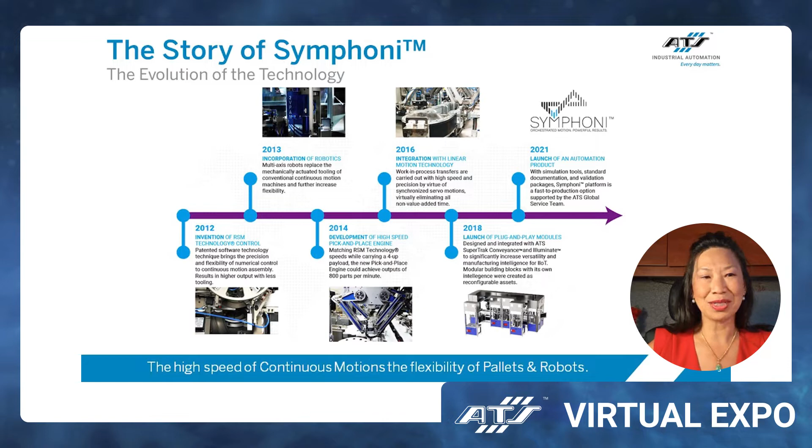It didn't take long for us to realize the huge opportunity. What product or process can have more variation than Mother Nature? The answer is nothing. Since we were able to conquer what Mother Nature threw at us, why not apply the principle of speed matching and synchronous motion to the assembly of lipstick, nail polish, toothbrush heads, inhalers, electro connectors, razors? You get the idea. It's pretty much products that have small discrete components that fit in your palm that need to be assembled. Each generation of Symphoni has addressed the limitations with conventional assembly technologies, from continuous motion, indexing motion, to pallets and robots. Today, after 5 generations, multiple patents, and machines sold across 4 continents, Symphoni gives you the benefit of all conventional assembly technologies without their limitations.

On the supply side, if one factory or one region is disrupted, you need flexible equipment in other places to pick up the slack. On the demand side, if consumer behavior changes rapidly, which it does all the time and at an increasing rate, then you need flexible equipment which can take on new processes and new products with minimal adjustment and time expended. This is what Symphoni is all about. You don't have to give up speed for flexibility, nor should you give up flexibility for speed. Customers want their product when they want it. They want it unique to them, and they want it fast. And so should you if you want to win. Symphoni combines the flexibility of pallets and robots with the high speed only realized previously with custom continuous motion machines. With Symphoni, you don't have to choose. You can have both.

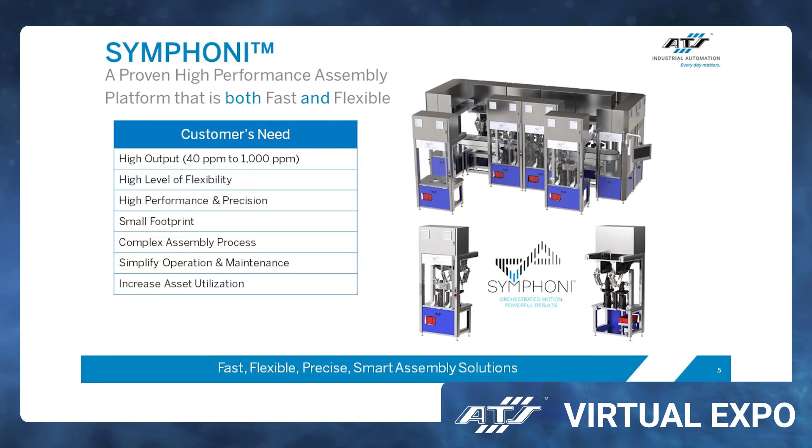Symphoni is a digital technology. The process in a Symphoni machine is the same as your current trusted process, except that the mechanical cam is replaced by electronic cam. In short, you can skip many of the obstacles that plague custom automation. Too often, these kinds of obstacles cause the introduction of a new product to fail.

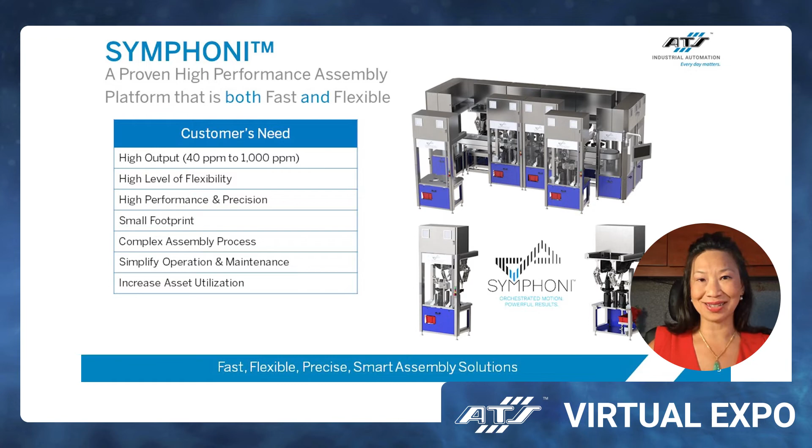Instead, Symphoni is versatile but uncompromisingly fast. It is elegant in its simplicity, but allows for a complex assembly process. It is high performance with small footprints. It speeds up time to market while reducing operating expenses and capital costs.

Imagine a custom automation solution for the assembly of soap dispensers. You go through all the hoops of many months to custom design and build a perfect machine. Your sales team gives you an annual sales projection for the next few years. From your experience, you know you have to buy a machine with a capacity that can meet the highest projected volume. However, during prototype phase, you send the assembly process to a cheap labor country to be hand assembled.

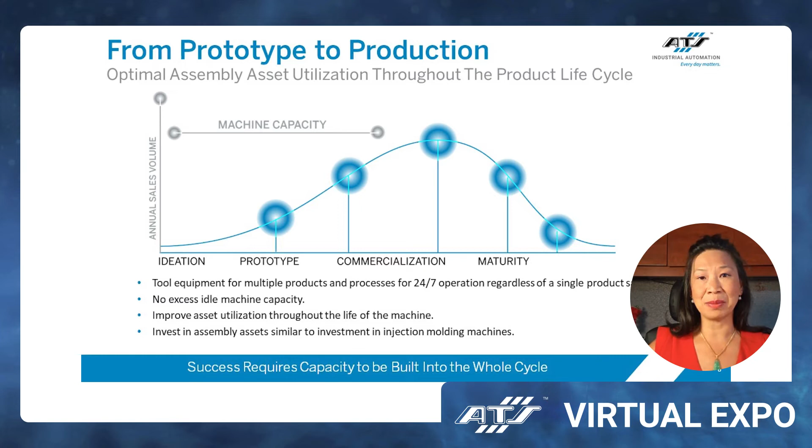In a best case scenario, as your production is ramping up, your machine builder delivers your custom assembly machine on time and you're able to meet your product launch date and meet the sales volume your sales team predicted. But what happened to that machine as the product matures and sales start to decline? You have an expensive asset that's underutilized and taking up expensive factory space.

With Symphoni, you can start with one module, which we call Sonata, to prove out your production process during your prototype phase. You can continue to use Sonata Cell for market testing. As your product proves successful, you add additional modules to configure a full Symphoni machine. As the product matures, you add new toolings for additional products. Thus, Symphoni is like your injection molding equipment, which depreciates over the life of the machine and is not written off over the life of your product.

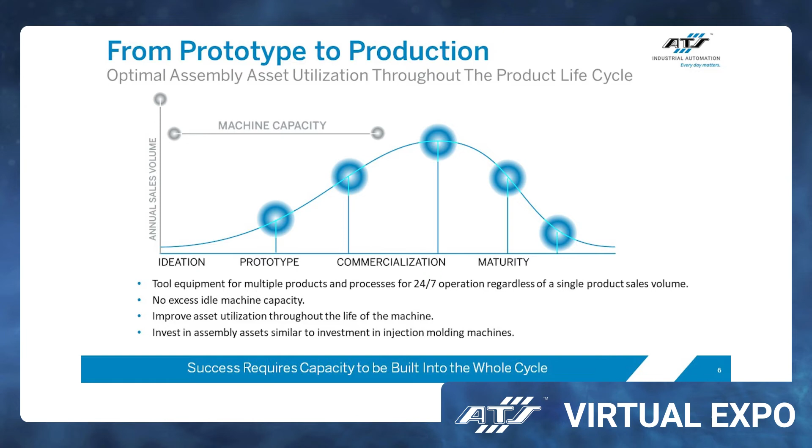It is a flexible, depreciable asset that never sits idle. It can run 24/7 by running multiple products or processes. It will never gather dust in a corner because you can change the tooling or reconfigure the module as your business changes. So let's recap.

Symphoni offers three main benefits: assuring your product development process, including manufacturing, validation, and approval, thus improving time to market. It lowers your capital costs by leveraging your investment from product development to production, eliminating duplication while maximizing your asset utilization. And it reduces the price per part through lowering your labor and operating expenses. Those are the top line tangible benefits.

But Symphoni offers your business one other thing in the face of a rapidly changing world. You can call it resilience or flexibility, or from my speech about global trends, agility. But for the sake of this presentation, the word we want is opportunity. Chris, over to you.

In this use case, a contract manufacturer needed to reshore their production of soap dispenser assemblies. The traditional solution for this type of assembly is continuous motion equipment. However, given the nature of contract manufacturing and the customer's production ramp, the utilization of a continuous motion machine would be extraordinarily low. The use of Symphoni would permit the contract manufacturer to fill the excess capacity of the equipment, which is inevitable during the initial product ramp, with a supplemental product, thereby increasing their profitability.

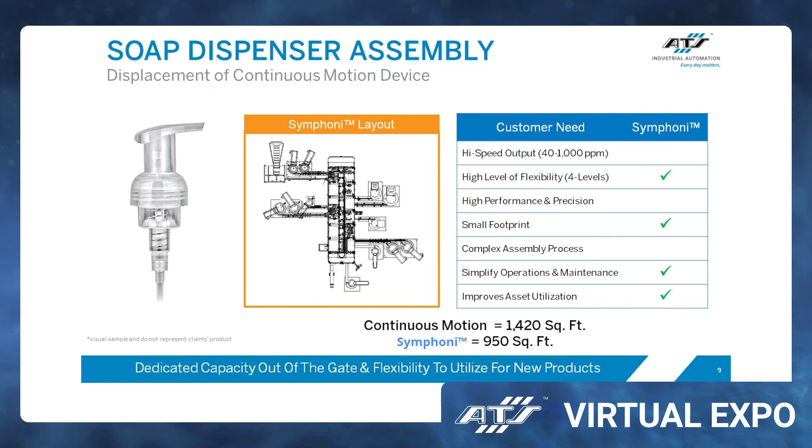This production layering is enabled by lower tooling costs of Symphoni, the flexibility of the servo-controlled assembly systems, and the user-level programmability of the system. Symphoni inherently has lower tooling costs than continuous motion systems. For example, a typical assembly station on a continuous motion machine may have a dozen or more of the same tool for the same operation. Symphoni in this case has only two.

Therefore, to make the system capable of two products, the continuous motion system would require 12-plus tools to be changed or replace the entire module. Symphoni can be changed over with simple replacement of two pick heads, the RSM disk, and a selection on the HMI. Symphoni accomplishes all of this with a much smaller footprint. In this use case, ATS considered a traditional cam-driven solution versus the Symphoni platform.

The contract manufacturer recognized the ability to take on new projects using the additional capacity of the Symphoni machine, as noted by the standby feeders and the layout in the middle of the page. This additional capacity and the relatively low cost to retool or dual tool a Symphoni machine allowed the manufacturer to consider bidding on contracts that they would otherwise not take on due to higher CapEx costs.

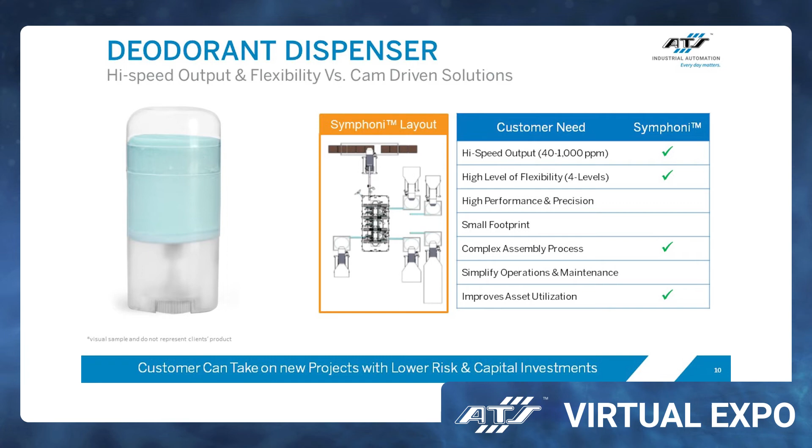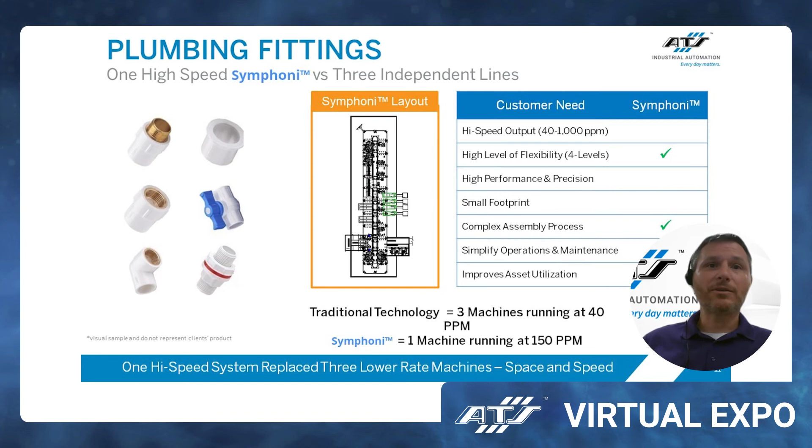The Symphoni solution for this application would require only one machine to replace 3 of their traditional assembly machines. In addition to the tremendous floor space savings, the asynchronous nature of the Symphoni chassis permits reducing the number of process stations to a minimum number based solely on that process alone. For example, what would be a 3 or 4 up tooling nest on a synchronous chassis can be reduced to 1 nest. This permits reduction in the quantity of expensive process stations such as laser markers, vision systems, and leak testers.

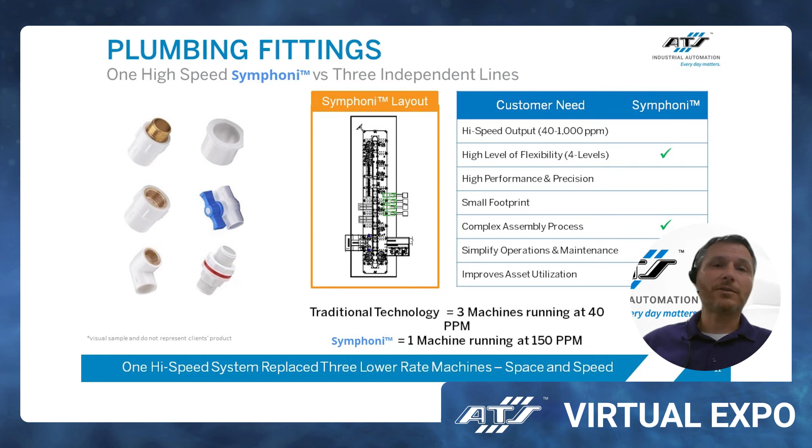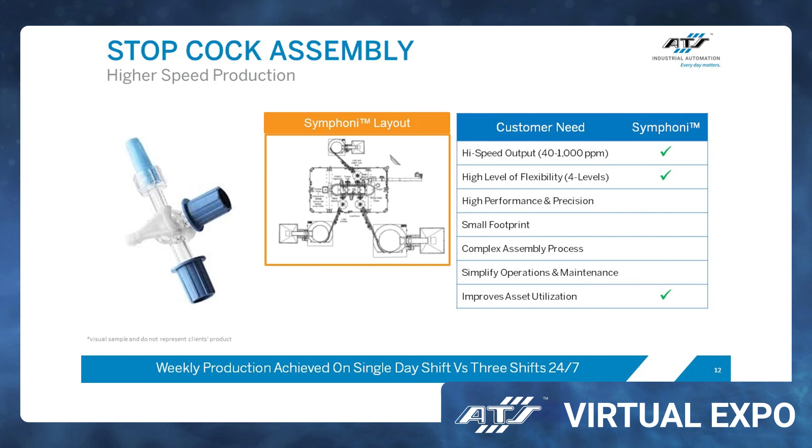By achieving 24 hours worth of production in a single shift, the manufacturer would no longer need to staff the department on second and third shift, while offering a rather small footprint as shown in the middle of the slide. Due to the flexibility and lower tooling costs of Symphoni, the manufacturer would now have 2 additional shifts for production of another product. While this is indeed a unique situation, this highlights the high speed and flexible nature of Symphoni.

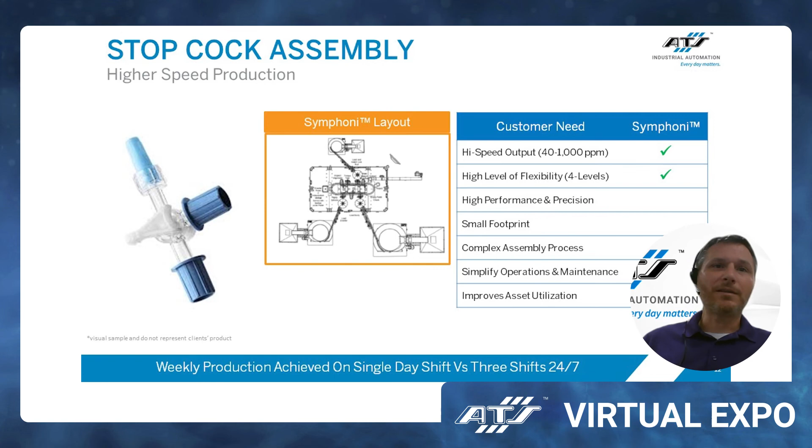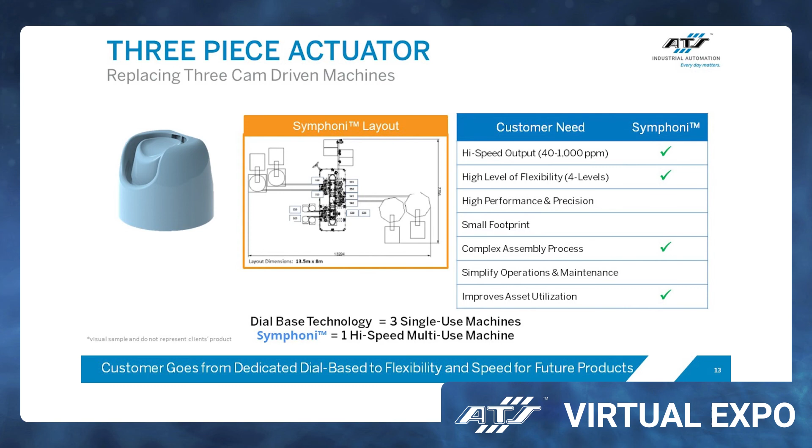In this final use case, a major manufacturer of household cleaning products recognized the flexibility of Symphoni for increasing equipment utilization and adapting to market changes. The manufacturer was using a dedicated dial-based assembly system for this 3-piece actuator assembly, as you see on the left. While it's a relatively stable product, the manufacturer has experienced significant tooling costs and production interruptions for adapting to ever-changing customer demands. By switching to the Symphoni chassis, the manufacturer not only improves asset utilization by running multiple products on the machine, but they will also be able to adapt much more quickly to market demands and at a lower cost.

Symphoni is a patented, proven, high-performing, flexible assembly platform for small, discrete parts. For over 9 years, we have revolutionized assembly automation around the world. What processes and products could Symphoni do for you? What doors could it open for your business? What opportunities are baked into this technology that we haven't considered yet?

Thank you very much. Our growing business needs a new automated assembly line. What are our options? Our factory floor is already tight. Management doesn't want to see idle equipment, so we need to find a solution that maximizes productive capacity. If we select an adaptable solution, we could consolidate other production onto this new line and retire old lines. And an adaptable solution would accommodate future products. R&D already said a new product is on the way. The sales forecast is strong.

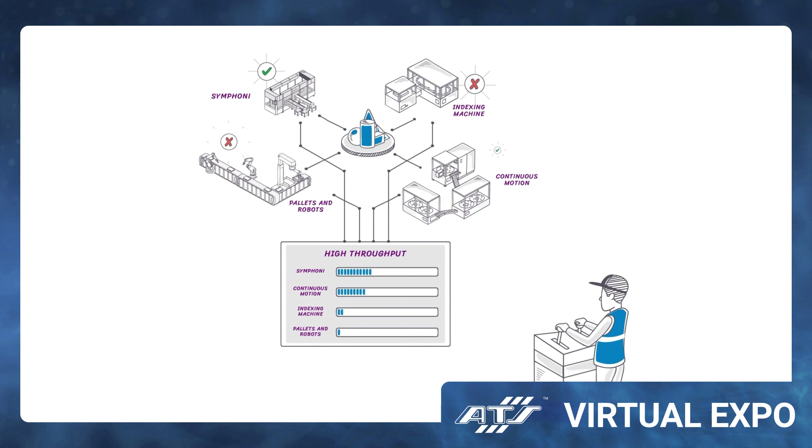We'll need a high-throughput assembly line. To meet the forecast, time to commercial production is critical. We need a line ASAP. Standard pre-engineered equipment would save us time and money and reduce our project risks. Wow, Symphoni meets all our requirements and more.